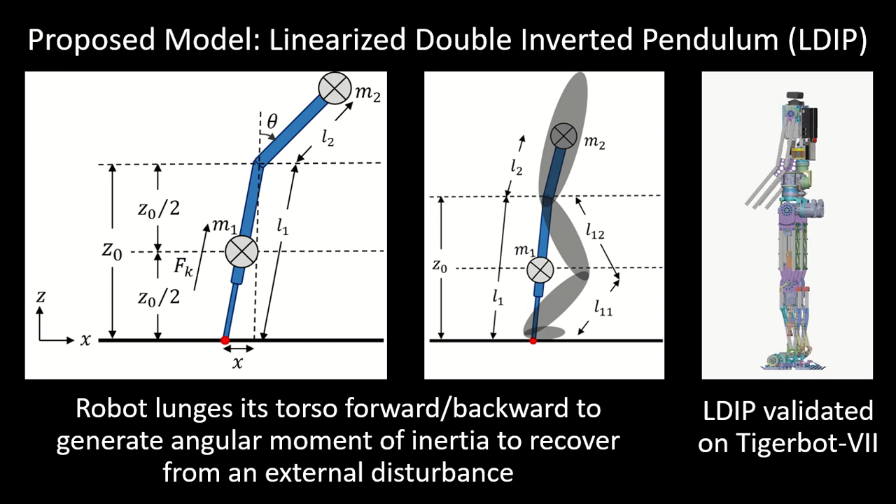In this video, we introduce the Linearized Double Inverted Pendulum or LDIP model and show some of its applications in humanoid push recovery. The LDIP is a simplified model that can approximately represent the dynamics of a complex, high degree

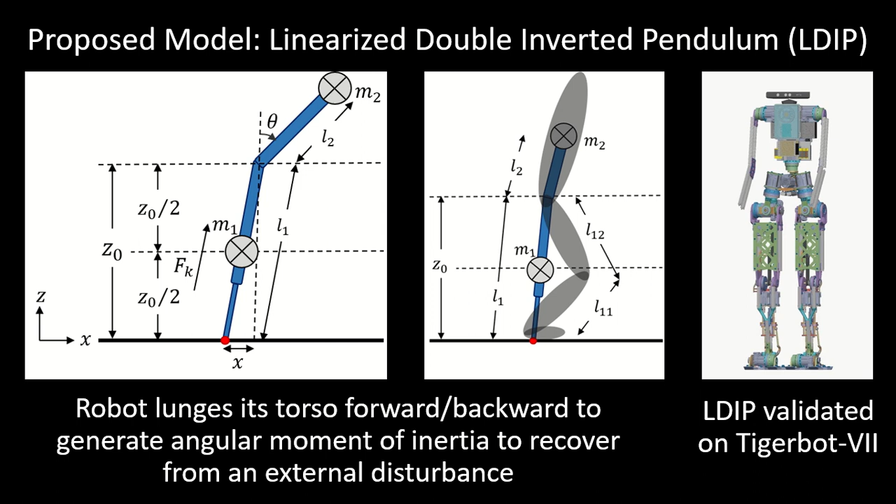of freedom humanoid robot. When humans are pushed, they try to rotate the arms or lunge their torso forward or backward to balance themselves. This generates an angular moment of inertia about the pelvis, which helps in regaining the balance. LDIP takes these things into consideration and models this angular moment of inertia implicitly.

The implicit modeling of angular moment of inertia in LDIP facilitates the use of modern control techniques like linear quadratic regulator with ease. The controls implementation for this work uses an LQR to calculate the control forces required by the model to balance the robot, while a PD controller is used to calculate the force component required to counterbalance the

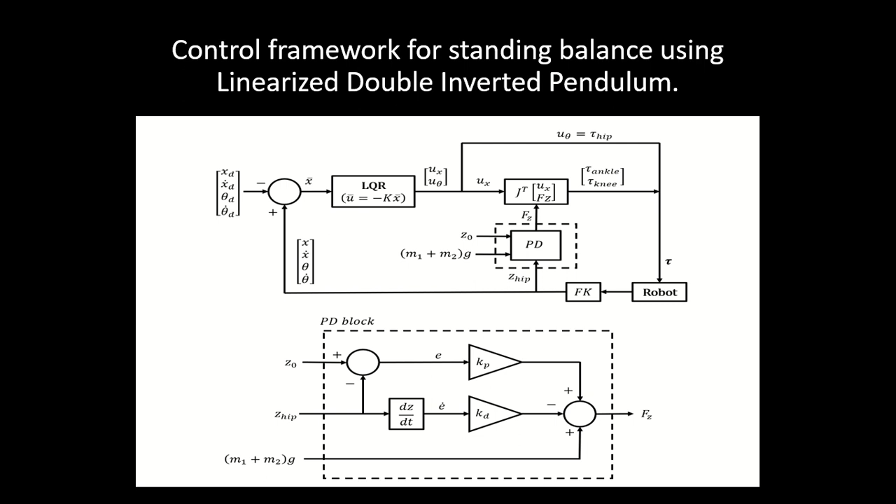forces due to gravity. Finally, joint torque signals are computed by relating the control forces with the joint torques using the Jacobian matrix. To evaluate the model performance, LDIP has been implemented and simulated in MATLAB.

The robot is given an initial velocity at the pelvis to simulate an external impulsive disturbance that changes the velocity from state of rest to the given test case velocity. An initial velocity of 0.5 meters per second is given at the pelvis of the robot. The red arrow indicates the direction of the external impulsive disturbance.

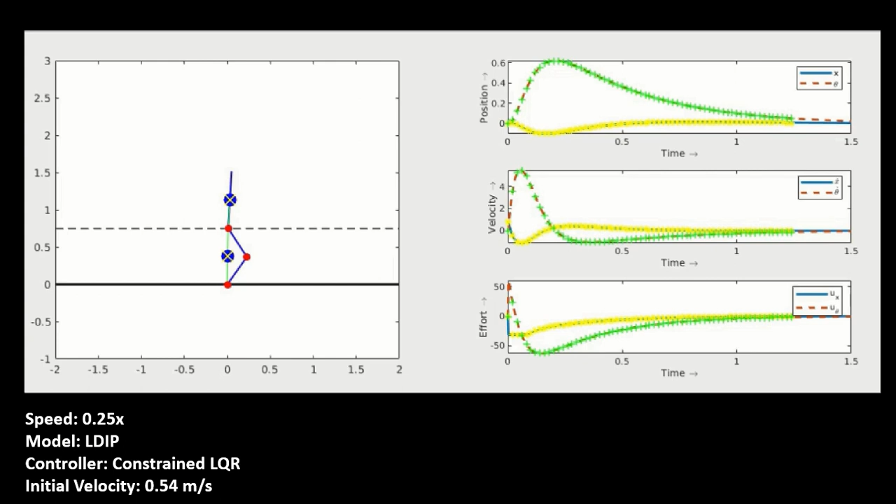As we can see, the robot lunges its torso forward to generate the angular moment of inertia about the pelvis that helps it to recover from the push. The LDIP model is validated in Gazebo using simulation model of RIT's humanoid robot TigerBot-VII.

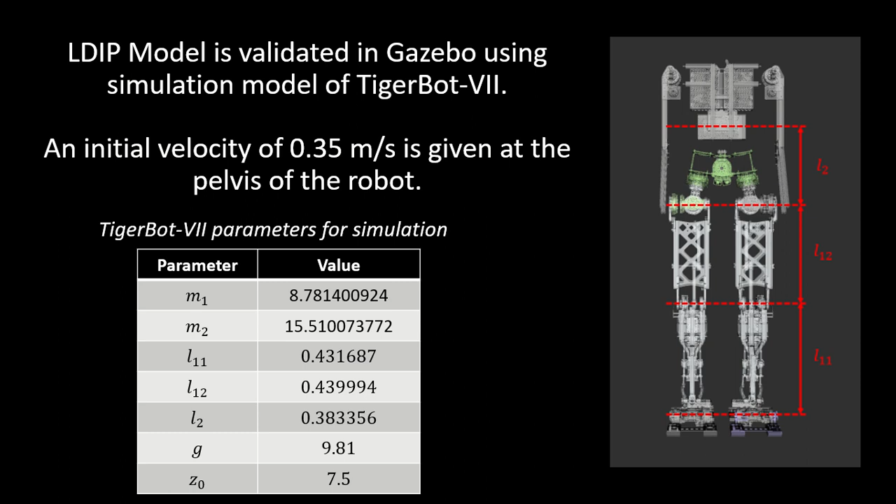In Gazebo, an initial velocity of 0.35 meters per second is given at the pelvis of the robot. As the external impulsive disturbance is applied, the robot successfully recovers from the push and maintains its balance.

Based on the results, it can be observed that the presented control architecture achieves the task at hand with minimal effort and force requirements. This enables the robot to recover from a wider range of disturbances without the need for taking a step.